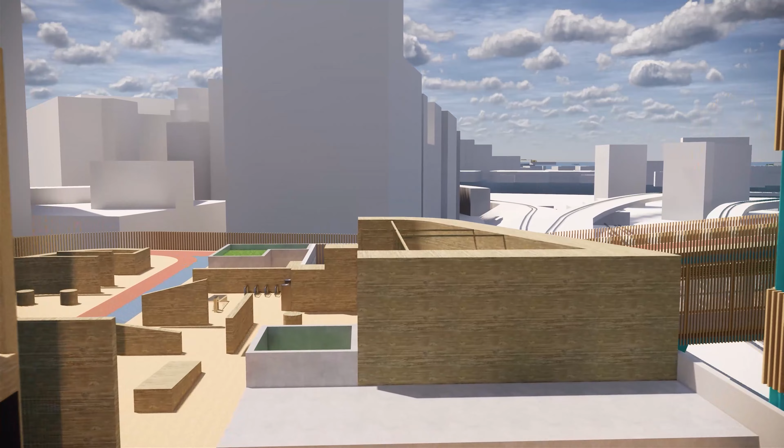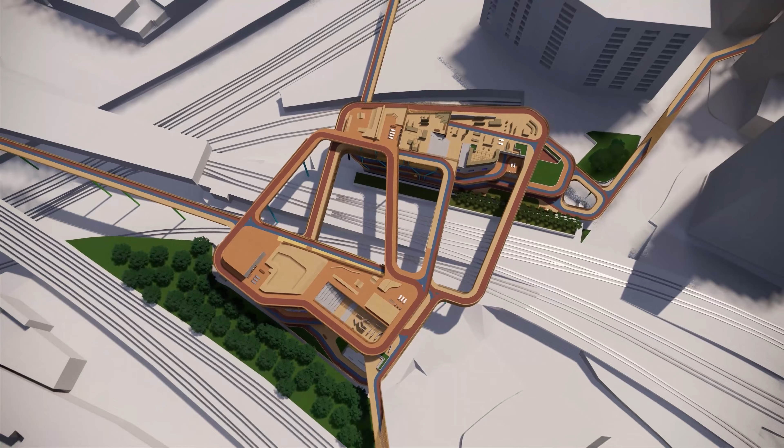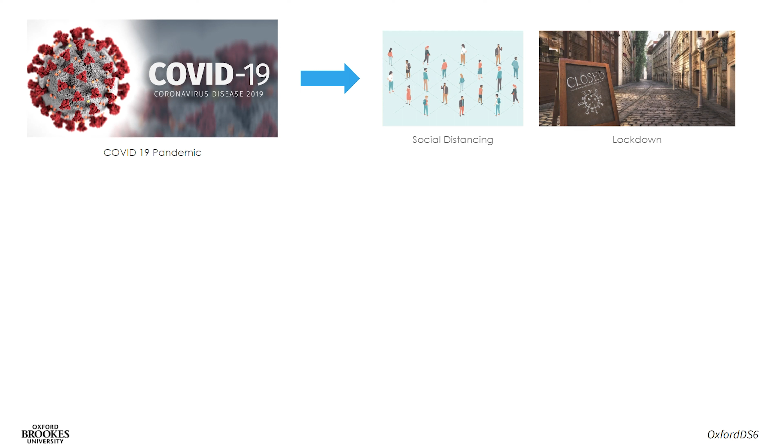In 2020, the pandemic of COVID-19 changed human habitation. Social distancing and lockdown have become a new normal at this time. Human lifestyle changed to stay rather than move because of the limitation, and the advancement of digital technology helps people do things remotely. These habits may develop a sedentary lifestyle. So, can we still get rid of any diseases in the future?

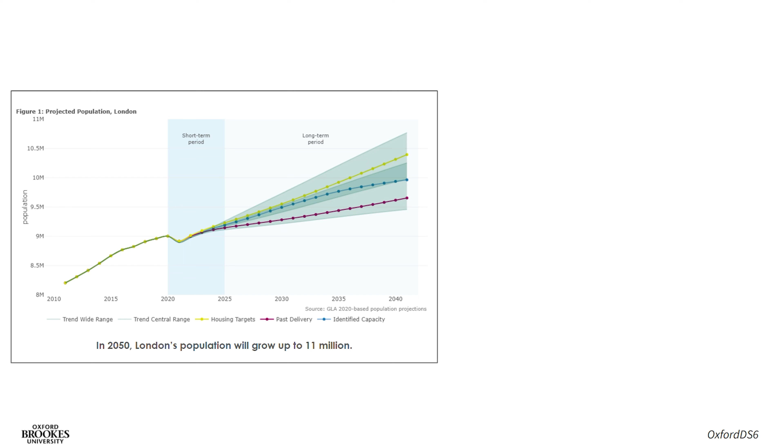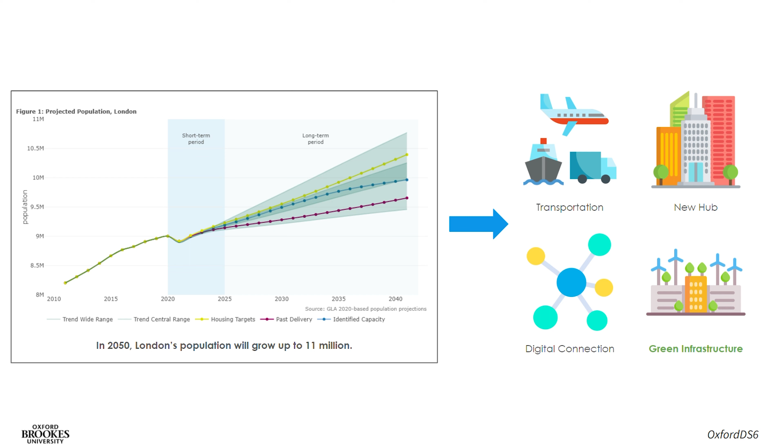London's population will go up to 11 million in 2050. Transportation, new hubs, digital connections, and green infrastructure are the key assumptions that help satisfy the demands of population growth and maintain London's international city reputation in the future.

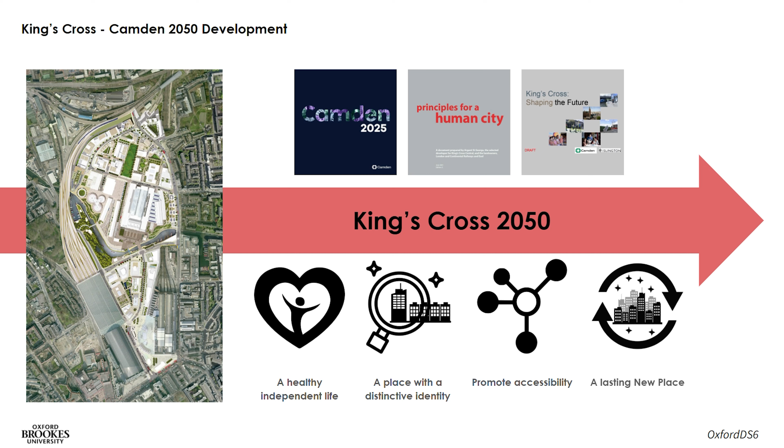With the planning of Borough of Camden and Islington, the vision of King's Cross development aims to create a sustainable city for people to live, work, and entertain in the future. Also, King's Cross is the iconic region of London, which has many opportunities to become a unique place to represent London. Enhancing the accessibility of the society and community adds economic and social benefit to the city. Therefore, it helps create a brand new image of the future King's Cross, London, and the United Kingdom.

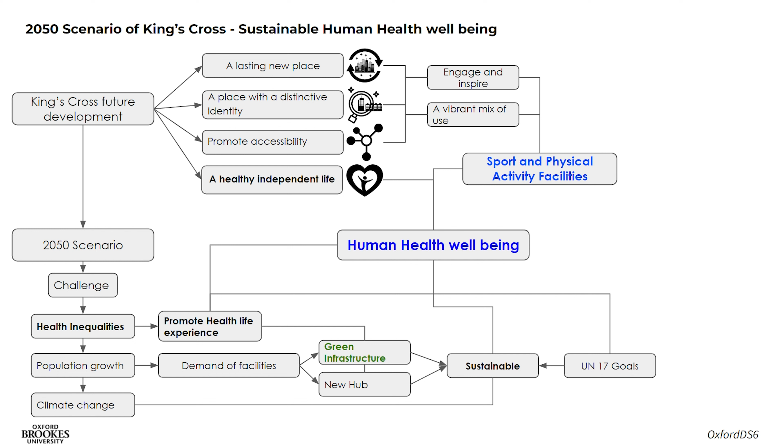With the 4 criteria of future King's Cross development and the 2050 scenario mentioning health inequalities and population growth, promoting a health life experience and green infrastructure are essential for the future city. Human health and well-being should be a priority, and the most direct way to address this is to encourage people to join sport and physical activities. A healthy lifestyle can establish a sustainable city image. This helps to improve social, economic, and community development and achieve sustainable goals.

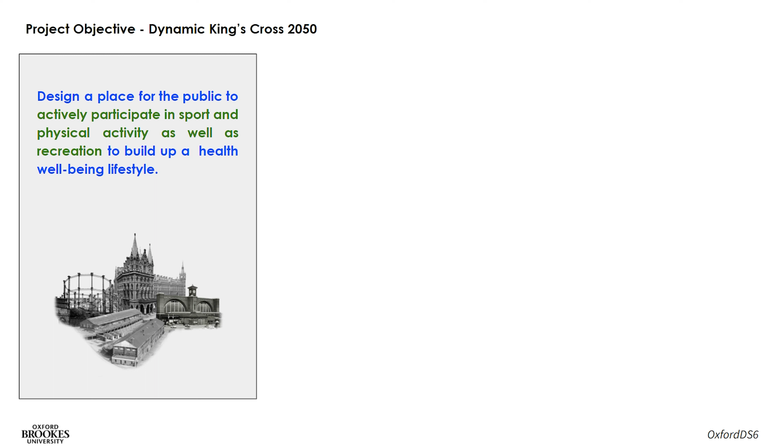The project aims to design a unique place for people to do sports and physical activities to maintain physical and mental health by testing and creating a new experience to engage people to do sports actively. Also, increasing the accessibility in King's Cross to other places for people on foot.

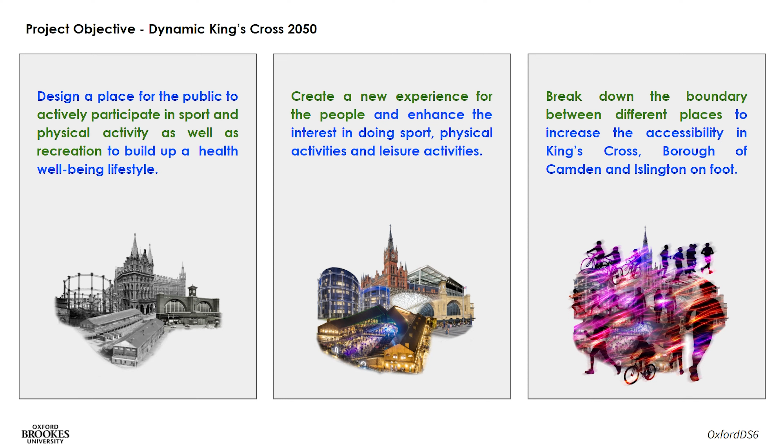The project site location is at the edge of different zoning, overlapping with the King's Cross development area, the Borough of Camden and Islington. Some mapping analysis shows that most of the building usage around the site is residential, and more green spaces have surrounded the site.

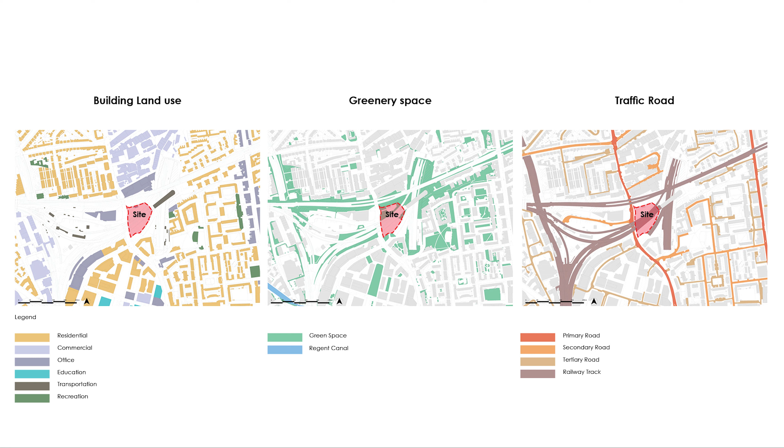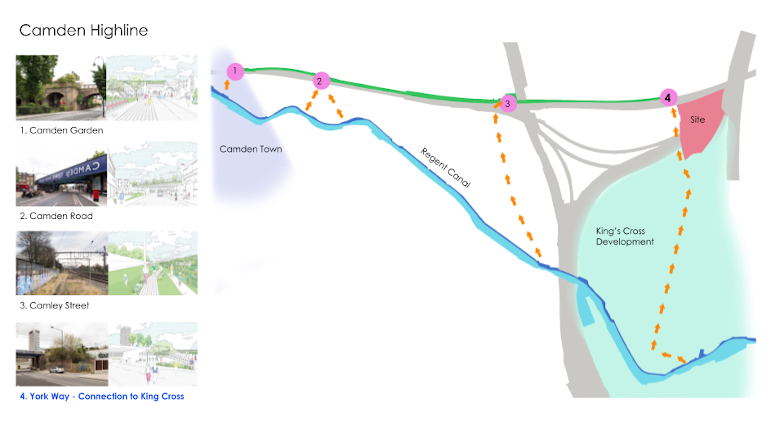However, the site location is divided by several railway tracks and ground-level traffic, which affects the accessibility on foot for people. Camden Highline is the ongoing project, which is the above-ground walkway from Camden Town to King's Cross. The 4th exit, York Way, is closer to the site and connects back to the King's Cross development area.

The target users of the project focus on the people who have a sedentary lifestyle, runners, parkour and skateboard users.

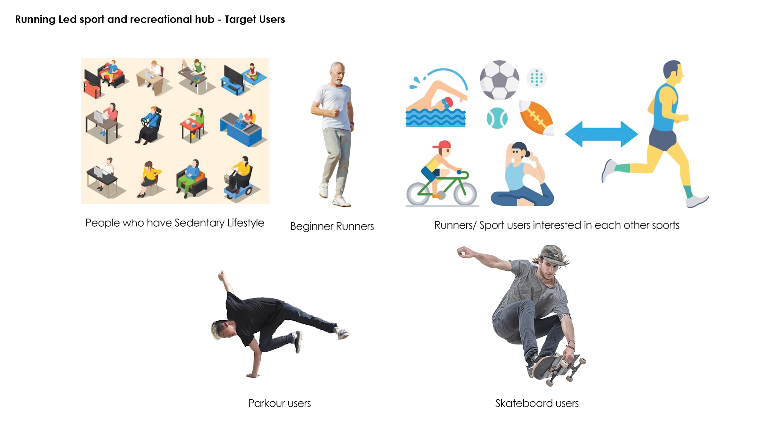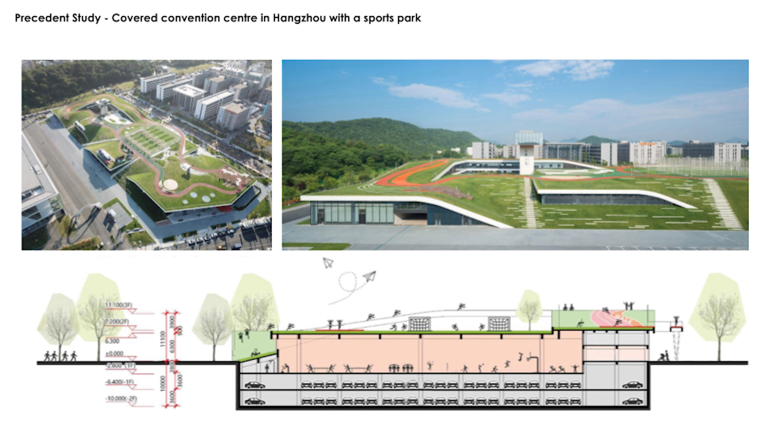A precedent study of a sports center in China shows how to use a rooftop landscape as a public garden to engage people to go smoothly from the landscape roof to the indoor sports space. Another study shows the building's roof is a running track which acts as a boundary of the site. People can go up to the top by entering the lower level of running tracks, or go inside the center landscape under the high level of running track.

The idea of the project is to design different types of running tracks to connect the surrounding area and for the runners to choose to run. Other sports users are not just limited by their sport but can also switch to other sports facilities from the running track to enjoy doing sport and relax in the area inside the building.

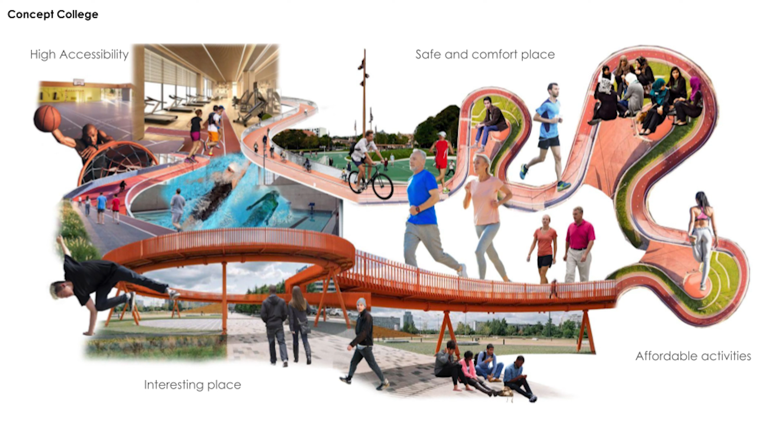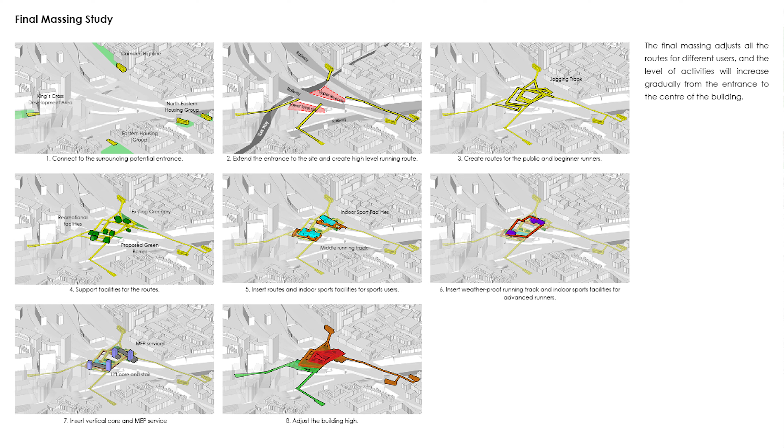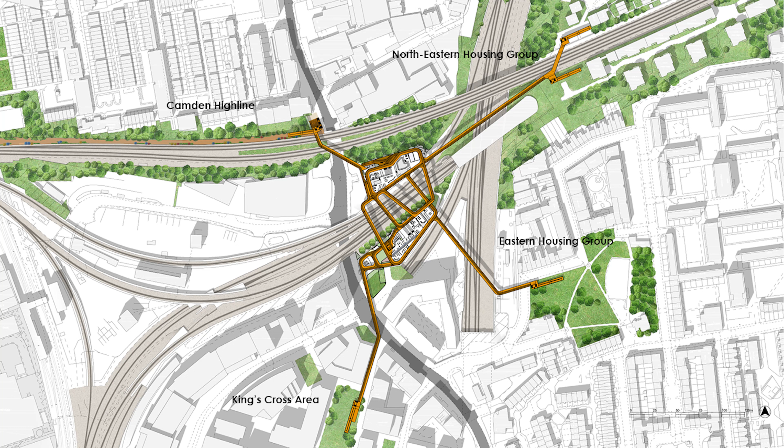The massing study tests the connection between the surroundings and the buildings, creating different running tracks, outdoor and indoor sports, and recreational spaces inside the building. The roof plan shows the running track sports hub reconnects the surrounding area: King's Cross, Camden Highline, and North-Eastern and Eastern housing groups. There are 3 types of running tracks inside the building.

First is the walking jogging track for the public to enjoy strolling, slow running and relaxing physical activities. More additional facilities are available for the tracks.

Second is the slow running track for the runner to do slow running. Some indoor sports courts are attached to the routes to provide indoor sports such as indoor parkour, skateboarding, gym and wall climbing. Other sports users and runners can switch to indoor sports spaces and running tracks on the same level.

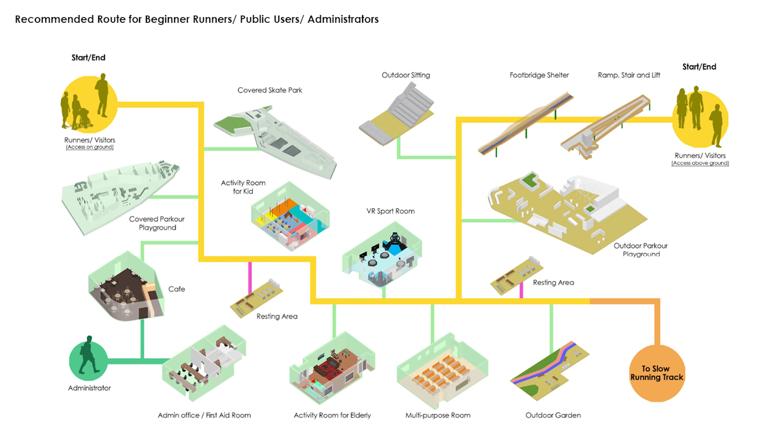The route is two-way with less turning angle on the track so that runners can run smoothly. Finally, there are indoor running routes for advanced runners and other sport users. This level has less indoor function space, and the path is straightforward, suitable for fast running. An indoor running track provides a comfortable indoor space in hot or cold climates. It is a one-way route to avoid interaction between runners moving in different directions in the same area.

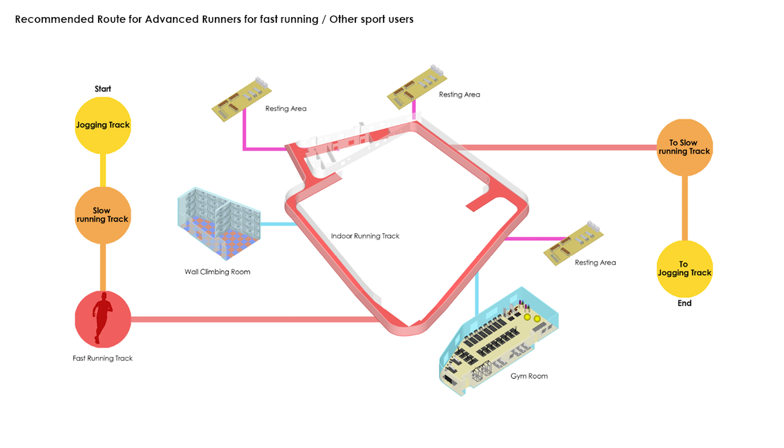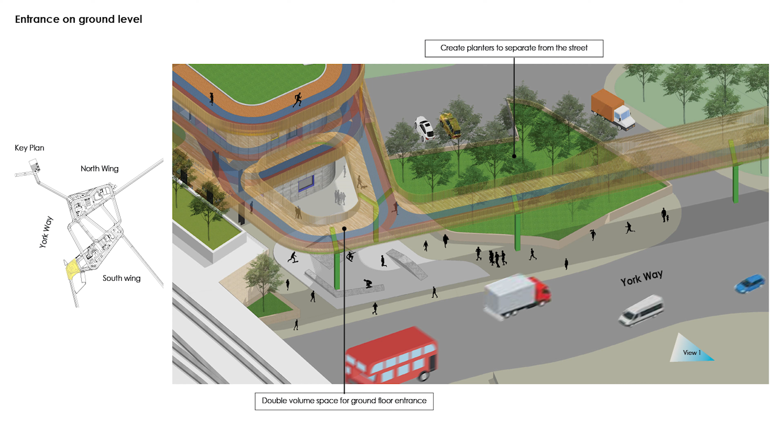The main entrance of the two wings faces York Way. It is separated from the street by greenery as a barrier. Together with the double-volume entrance, the access on the ground level becomes more attractive to people from the road.

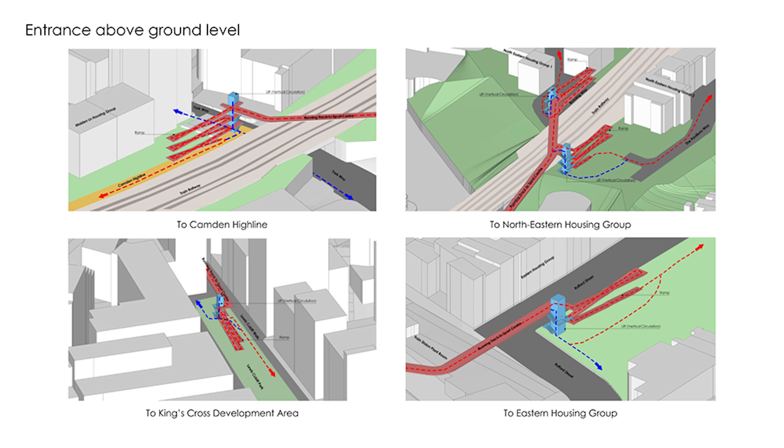Here is the view from York Way. There are 4 entrances above ground level to access the building. They connect to the surrounding area and the building using the footbridge and vertical circulation.

Each entry contains a ramp, staircase, and a lift for the public to cross the railway on top, avoiding interrupting the traffic. There are some resting huts on the footbridge for users to have a short break during the long walk or run on the footbridge under the exposed environment.

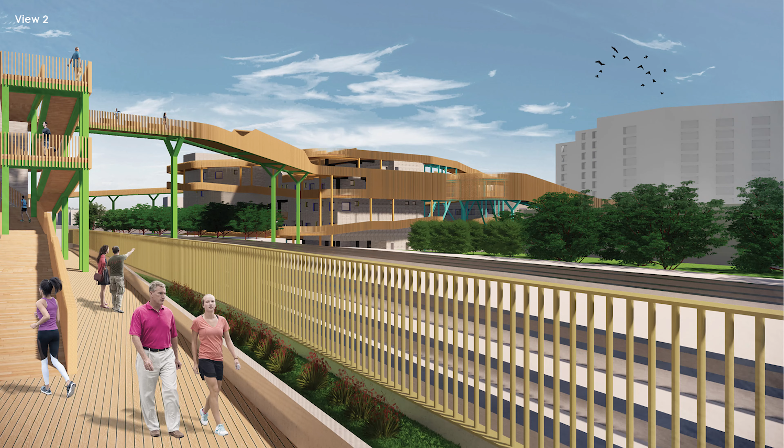Here is the view from the Camden Highline to the building. Each wing of the building contains an outdoor garden at the lower level to meet the existing greenery and propose green barriers, increasing the open area for leisure activity for public users.

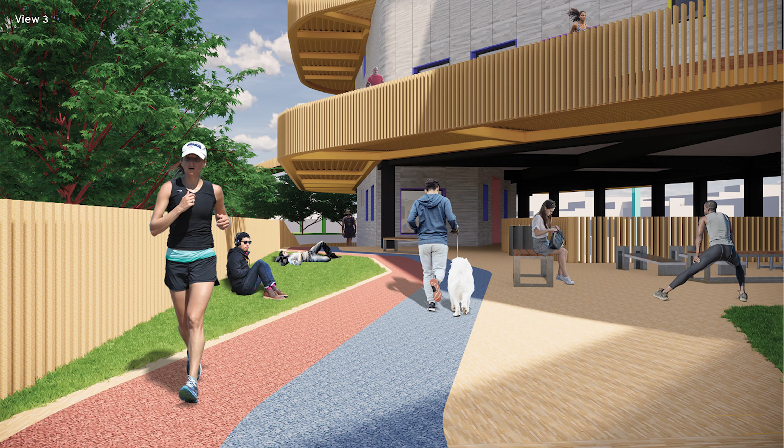Here is the view at the first floor of the south wing. There are 4 openings for every indoor sports court: door, bay window, ventilated window, and platform window. Different colors painted on the frame increase the visual connection between the court's interior space, the running track, and the corridor. It also provides more zoning for users to have a short break and relax after the run or walk.

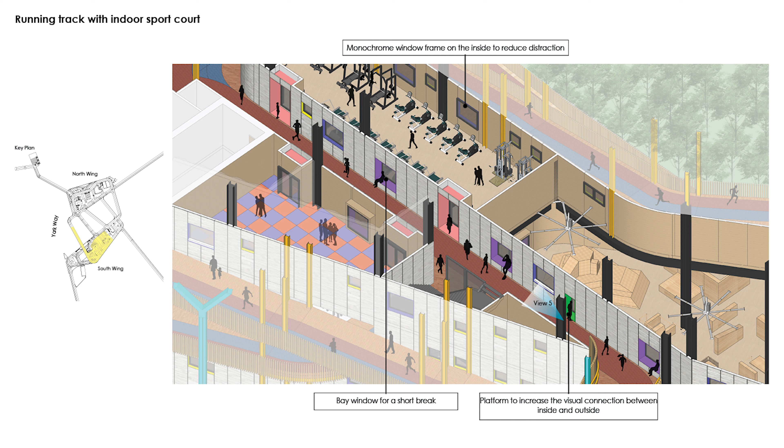Here is the view at the fifth floor of the south wing. The resting areas contain benches, drinking fountains, small fitness chairs, and bike parking to let users rest or stretch before or after physical exercise, close to every running track.

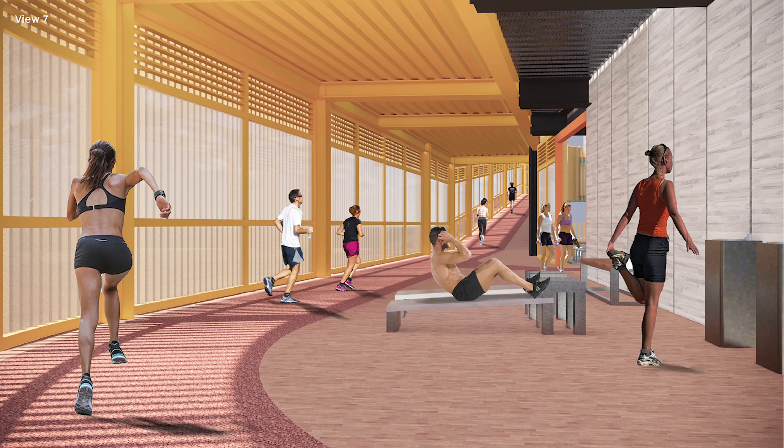Here is the view of the 4th floor indoor running track with resting area. The building and the running track structure use recycled steel structures, which offer strong support with a longer span and thinner beams and columns.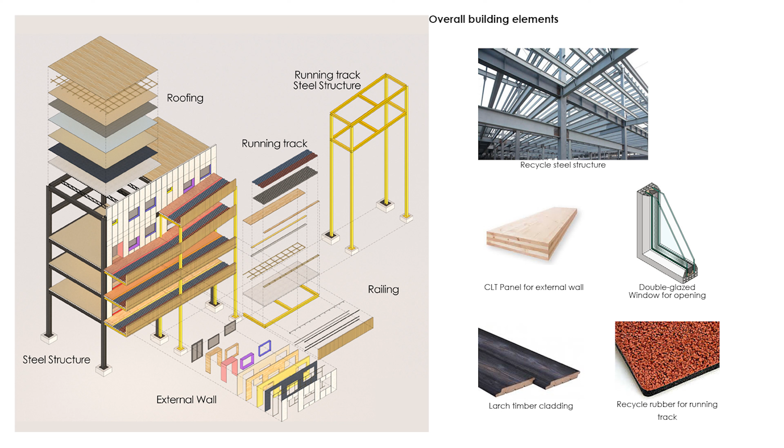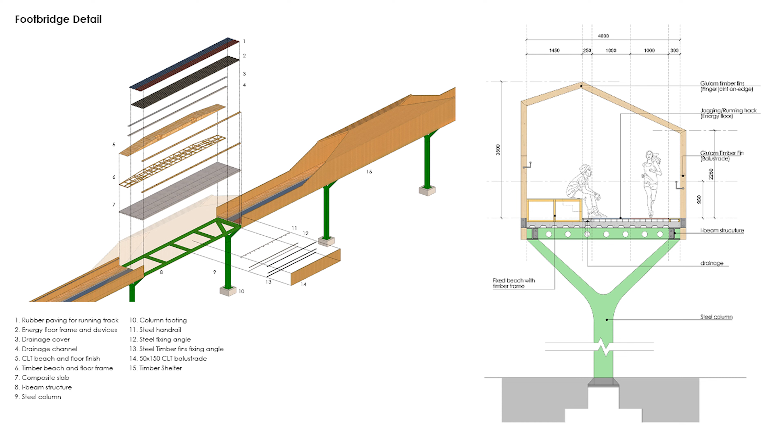The external facade of the indoor running track contains timber fins and a double-glazed window wall to prevent overheating from the inside and act as a shading device for the interior from direct sunlight.

The external wall of the building is a drywall construction using CLT panels and insulation foam board to have good insulation from the exterior.

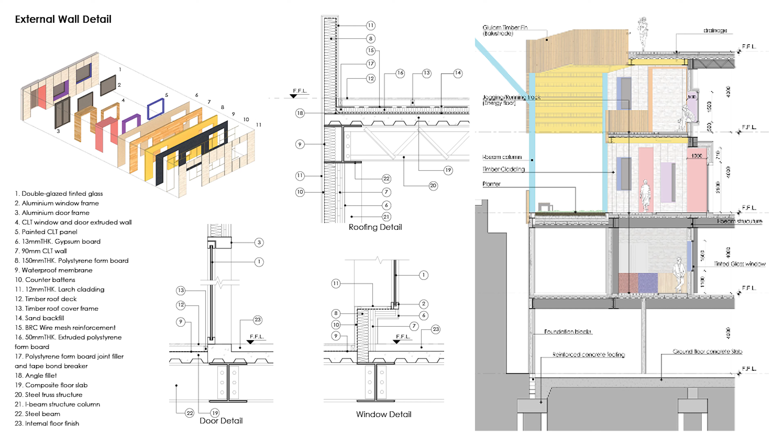Additional structural support will be added to the ramp, separate from the main building structure. Most of the interior function rooms contain more than 2 facades facing the exterior, which increases lateral ventilation of the interior space through cross ventilation.

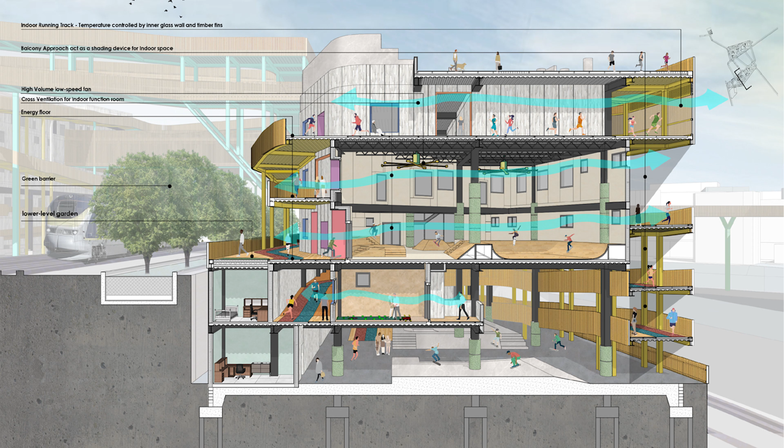Also, the track attached outside the interior space acts as a shading device to minimize direct sunlight entering the interior during summer. Energy flooring will be applied to the running track to generate power when the user is stepping on the track.

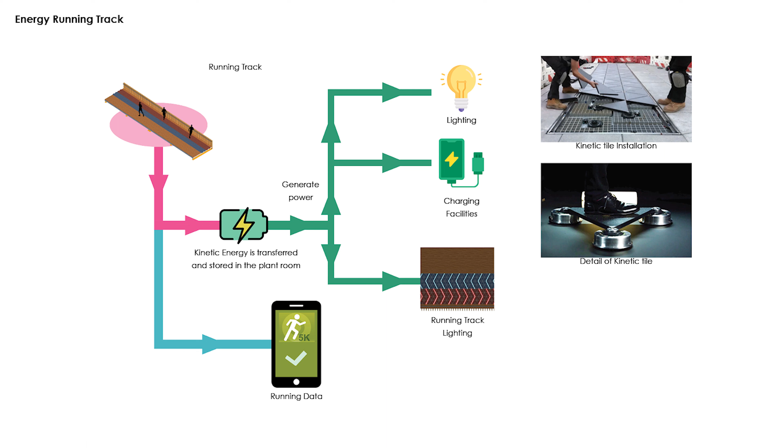This energy source from the track is used for lighting and the electrical charging system, as well as lighting up the track for guiding direction.

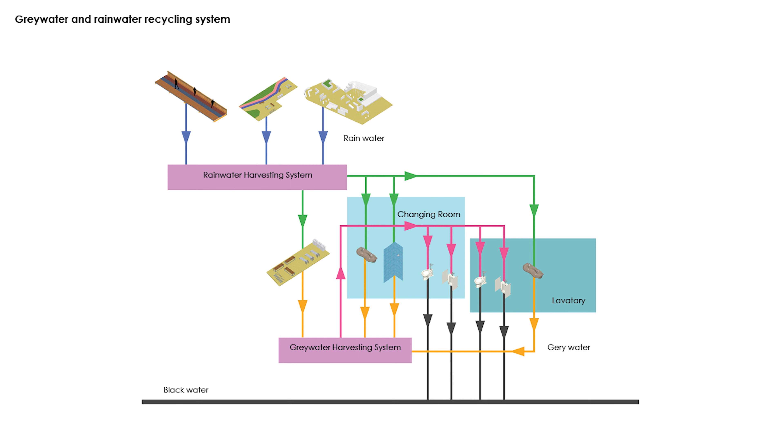Rainwater and greywater harvesting systems are applied inside the building to collect rainwater for sanitary purposes and flushing respectively, to save water consumption inside the building.

A new typology of running and a playful experience can encourage more people to participate in sports and physical activity, establishing a healthy lifestyle in King's Cross and the surrounding area. People can live in a healthy and peaceful community with high accessibility, enjoying sports and running in the future.